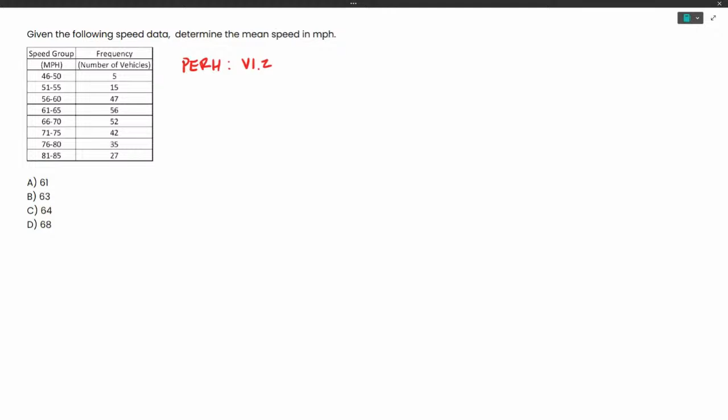Now this problem is a little bit simpler than it may seem. Whenever I saw this problem starting out, I was a little bit confused, and kind of worked through it, and it started making sense. So the first step is finding a formula, and this is going to be a PE reference handbook problem. You probably won't see this on the FE, but it'll be on the PE for sure. We're going to have version 1.2, that's the latest and greatest at the time of this recording. And we need to make sure that we're looking in section 5.1.2.5. That's going to be on page 274 of the PE reference handbook. When you go there, you're going to find a formula that looks like this: mean speed is equal to sigma.

I think it's the Greek symbol sigma. We're going to have a lowercase n with a sub i, and then a capital S with a sub i. I'll explain what all these are in a minute. And then we have a capital N in the denominator.

So to talk about some variables here, this X bar is your mean speed. I'm going to try to write neatly - I have terrible handwriting, but alright.

This guy right here is your frequency, so it's the number of vehicles in that speed group. The capital S is your average speed. We're given speed groups, and what we need to do is solve for an average speed out of those speed groups. I'll walk through that.

This in here is the total number of vehicles in our study, so that's just adding the frequencies up, and we end up with a number. I'm going to go ahead and get started here.

So our S, let me see if I have room. I'm going to write a capital S right there, next to that 46 through 50. What we're going to do is find the average of that speed group. This guy right here is 48. We have 53 on this next one. Let's see, 58, and then I think it's 63, 68, and so on.

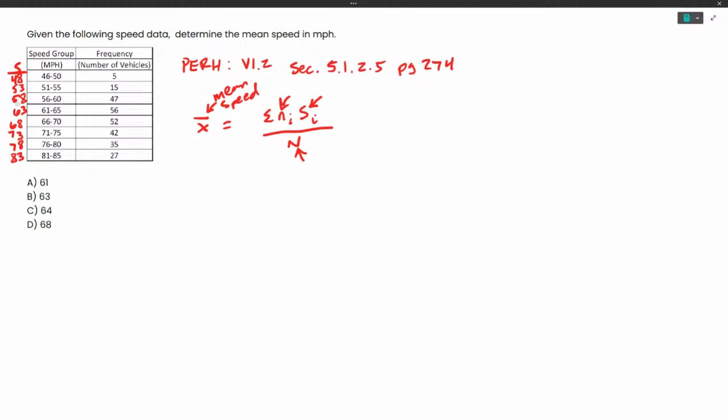This is the part where on a video I'd pause and edit it out because it's kind of boring just watching me write. That's 78, and this is 83. So basically what I did is 46 plus 50, divided by 2, you get 48. 51 plus 55 divided by 2, you get 53. That's your average in your speed group.

You're assuming that 5 vehicles are going 48 miles per hour. That's really the only way we're going to be able to solve this, by finding an average out of that speed group. Hopefully that makes sense.

So this guy right here, I'm going to write down here. We've got a mess of an equation. So we have 5 vehicles times our average speed, 48 miles per hour. Plus - this is going to be very repetitive here in a minute - 15 vehicles times 53 miles per hour.

There we go, plus - you see where we're going with this, this can get pretty boring pretty quick - 47 vehicles times 58 miles per hour. And always write out your units.

I had a professor, let's see, I think it was my junior year of college, who if you didn't write out your units would dock you 10 points, something stupid. It really frustrated me because I didn't write out my units, but looking back, I'm pretty thankful that he did that.

We have 56 vehicles - I'm going to have to double check and make sure this is all right after I write this stuff out, I might be missing one. Plus 52 vehicles times 68 miles per hour.

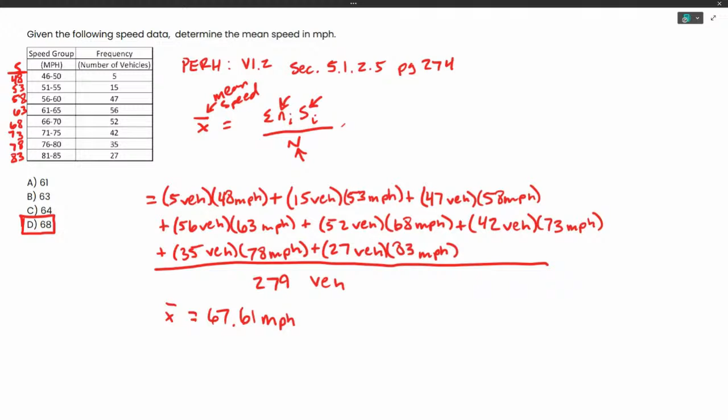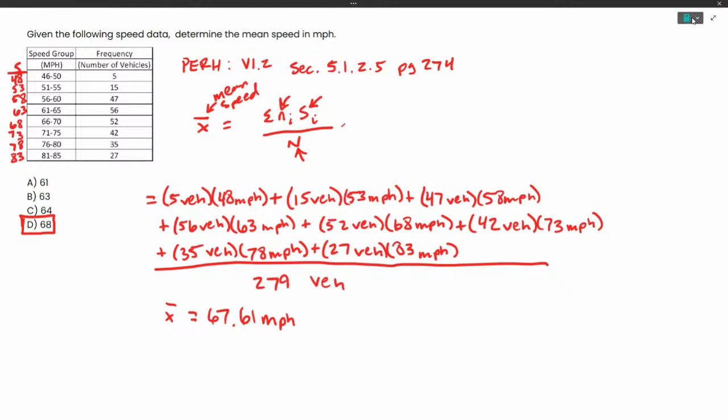Is there any questions on this one? I saw the chat lighting up, let me check. I think this one's pretty straightforward - I haven't had any questions related to the problem. Did everybody post good? I was jumping in there asking stuff. I think we're good. If you guys have any questions on this problem, please feel free to post it and we'll go back to it. There's no stupid question with these. Also, whenever I move on to the next problem, if you have a question about problem one while I'm on 2, 3, or 4, we can hop back - super easy, no worries. Aiden got the same answer, so you're good. That's good, that means I did it right.

This next one is pretty unique - something you could see on the FE or PE. The FE doesn't really give you a lot of material on it, so maybe they won't ask for the bearing but they'll ask what quadrant it would be in, something like that. For the PE, while I was studying, a similar problem popped up, so I figured this is a good workshop problem to work through. I'll give you some bonus info too while we're at it. This is a surveying problem, or basic math as I like to call it. I don't think there's a specific section on it, but it would definitely be a breadth problem - you won't find this on your depth stuff.

A surveyor has calculated an azimuth angle of 276.175 degrees. What is the bearing in degrees, minutes, and seconds?

It can get a little tricky, but if you think about this in terms of quadrants, you can solve this without even doing any math. But I'm going to go through the problem and explain how that's possible. I'm going to draw a picture - this is a good idea whenever you're taking the exam and see an azimuth problem. Go ahead and draw your quadrants or Cartesian plane.

An azimuth starts at 0 on the north axis, and it works clockwise. So we have 90 here, 180 down here, and 270 down here. We're starting at 0 and going around the circle until we get to 276 degrees.

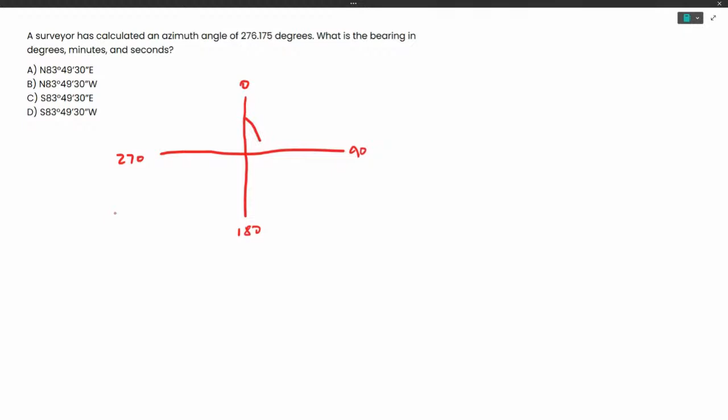I didn't have a protractor for this one, so it might not be exact, but this is 276.175 degrees. Now you can kind of see how, if you draw it out, you basically have the answer without doing any math. But it's good practice anyways.

This is north, east, south, and west - never eat soggy waffles, if you forget that, it's a good way to remember the Cartesian plane. So you can already see, from the north to the west, your some odd degrees - the answer is probably going to be... let me think, B. B is probably going to be our answer, but we're going to go ahead and solve it.

So what we need to do is solve for this angle. The way bearings work is they pull off the major axis being north or south, but it's going to be the nearest axis. We're pulling from north to west, that's the closest angle from a major plane. If you went from south, you'd do more than 90 degrees. So you need to pull off the nearest major axis, which would be north or south. You always start with north or south with your bearing, then work your way west or east.

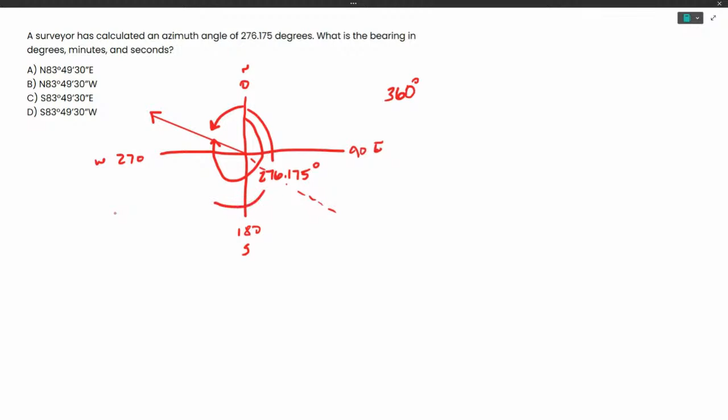So to solve for this angle right here, from north to west, we need to subtract 360 degrees, because it's 360 degrees all the way around the circle. If we subtract 276 from that 360, it will give us what we need from north to west. Does that make sense to everybody? I hope so. So we're going to subtract 360 degrees minus 276.175 degrees.

So what you end up with is basically the answer: 83.825 degrees. Now, the reason I included this problem is that it's essentially easy—you can solve it quickly within seconds if you know what coordinates you're dealing with.

The reason I included this is because you need to practice converting from decimal to degrees, minutes, seconds. There may be a problem on the exam where you have to solve for an angle and convert it to degrees, minutes, seconds, and they won't all be the same. So we could have had 83, 46, 29 or something instead of them all being the same. There were two different avenues I could have taken, and I chose the easy route for the answers, but I wanted to show you guys how to do that.

Now, there should be something on your calculator. Let me see, I've got a TI-30X IIS, whatever that is. There's a way you can convert to degrees, minutes, seconds, so I'd definitely look into your calculator to see if you have that tool.

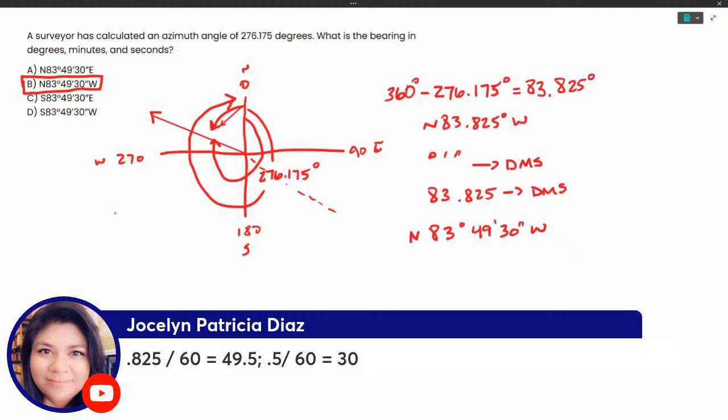Everybody good? Any questions? No questions on that one. All right, moving on. All right, we got a theory problem, everybody.

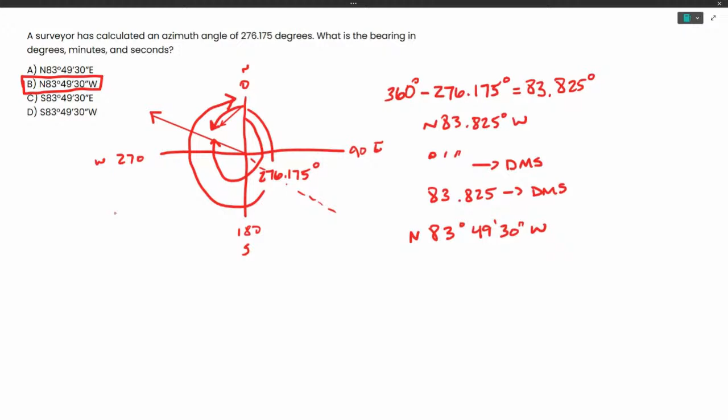I need some engagement out of the audience. Everybody's been pretty good so far, but this one I need some help with. If you're taking the transportation depth, I think this would be right up your alley. You should probably know the answer to this one. This is going to be a traffic engineering, traffic analysis problem.

So out of the chat, I'm going to give everybody like 15 seconds, kind of give me an answer, and we'll go from there. I'm going to count down in my head and give everybody 15 seconds. It's okay if you don't know it—I'll answer it. In the meantime, I'll talk about the course.

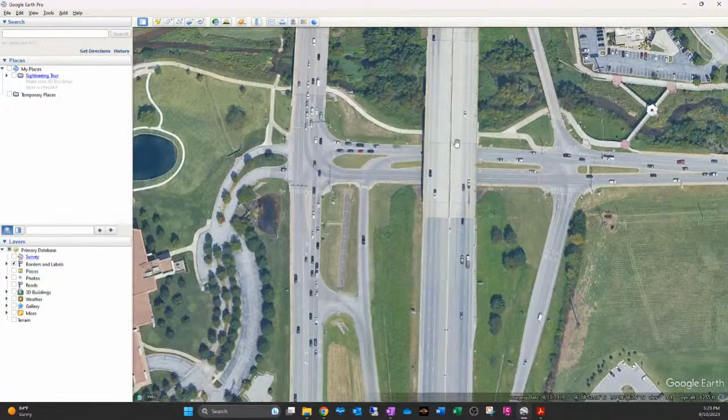The reason why I know it's a freeway is number 1, because it's got these little off ramps, right? And it has an overpass. And that's what it means by an at-grade intersection. An at-grade intersection would be something like this, where you have an intersection at grade, so that you're not going to have an overpass or something. A freeway has something similar to this, where you have an overpass and you have these on-off ramps like this.

I think freeways can have anywhere from 4 to 8 lanes, and a multi-lane highway is 4 to 6, I think. Here's your multi-lane highway over here. Here's your twiddle - your 2-way left turn lane. Remember, this is not necessarily a median, it's a 2-way left turn lane. So if these guys need to turn left, they can hop in here and go that way, or vice versa. They can use this to get on.

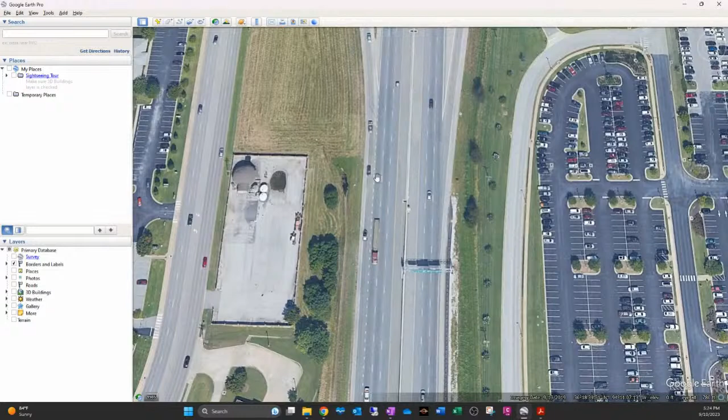This guy has on-off ramps, and then it's got this median right here. You can't really see it, but this is a concrete barrier that separates the northbound traffic from the southbound traffic. So with that said, is there any questions about that?

Does anybody have any additional questions while I've got the fancy Google Earth pulled up? Everybody good? Go into the chat rooms. It looks like we just had our answer selections. Some are kind of all over the board with C's and D's, but nothing about.

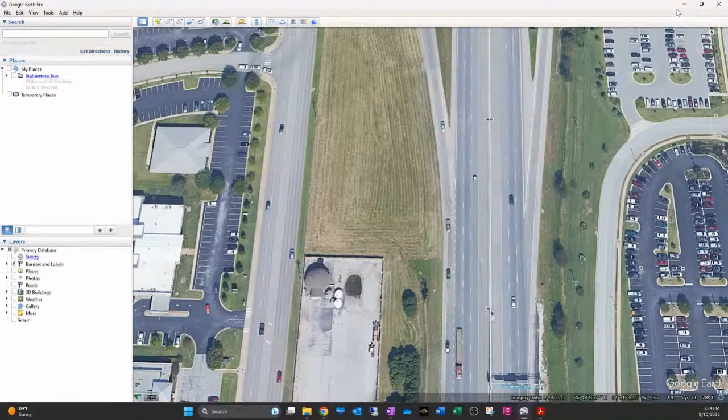Yeah, the reason why it's not C is because typically a freeway will have a divided median. It is a characteristic of a basic freeway segment. Enters, exits only through interchanges, same thing - it is typically a freeway segment or a characteristic of a freeway segment. So that's why it's not C, D, or A. B is going to be your answer.

The main difference between freeway and multi-lane highway, for the next problem, is at-grade intersections and divided medians, right? So if you have an at-grade intersection and not a divided median, you're talking a multi-lane highway. Yes, a highway would be... no, sorry, let me think. A highway is not D, it is a freeway. So a highway has at-grade intersections.

So you hit a traffic light and you turn - basically what I just had pulled up on the Google Earth. I thought you said freeway, that's why I got confused. Here's your highway, right? So you have a traffic signal right here. We have a traffic signal here, an at-grade intersection, and then we have a freeway here that has an overpass.

So D, enters/exits only through interchanges - think about it entering the next facility. This guy, if they're traveling on a freeway, they have to enter/exit through this interchange. They have to hop on this ramp to take a left or a right. These guys right here, they don't have to do that - they just hit the traffic signal and they turn, or they go straight. So that's the difference between a multi-lane highway right here and a freeway.

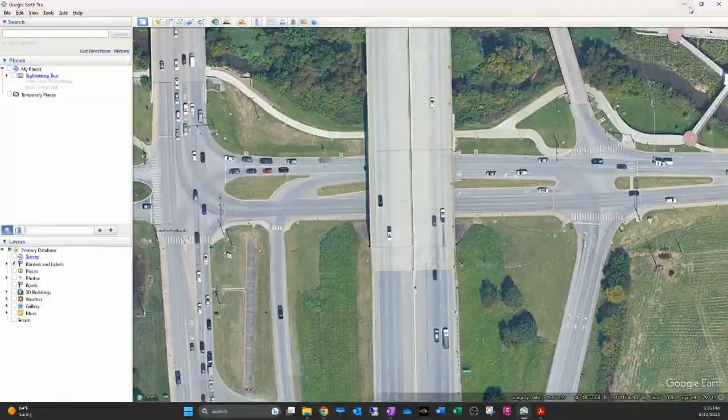Everybody good? Is that still confusing? Did that clear that up? I appreciate the question, yeah, I think we're good. All right, we're going to move on. If there's any further questions, we can hop back, but I'm going to go ahead and move on to the next question.

Problem 4, all right, here's another one. I need audience participation again. Don't be scared to be wrong. Nobody knows you. This is going to be an FE or a PE problem - this is going to be something that you just need to know. I would lean more towards the PE type of thing.

Could I pause you? Yes, we have one question on the last one - no signals on a freeway? I haven't come across a signal on a freeway, so I would say you're correct on that. I would say that's a good question, yeah, that's correct, because it would be an uninterrupted flow - the freeway is always uninterrupted, it doesn't have traffic signals or anything like that. But a highway, multi-lane highway, can be uninterrupted or interrupted depending on the frequencies of the signals. So if the signals are really close together, it's an interrupted flow type of analysis.

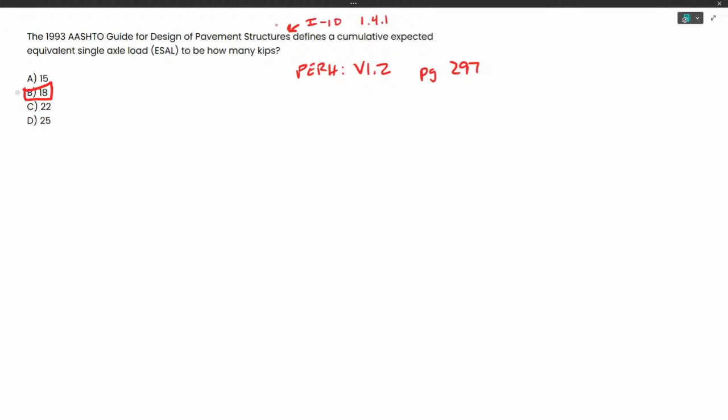We got a banger of a problem on deck. I'm excited for it. No questions, just a lot of comments on B. Motorhead1 says 26 kips on modern trucks, FYI.

All right, here's our big daddy right here. This is going out with a bang, our last problem of today, and then you can go back to your football. I know it's a letdown that you have to go back to football, but this is good stuff.

So here's your FE. Let me make sure I have an FE standard for it. Yep, I do. This is an FE or a PE problem. We're going to be talking about pavement evaluation again. This is an ESAL problem.

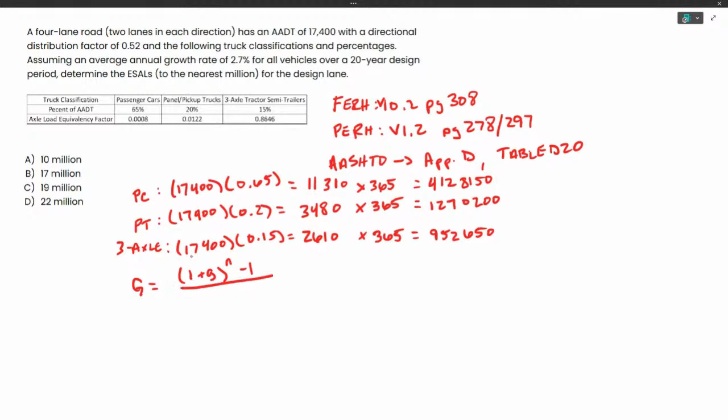It's 1 plus G, lowercase g, raised to the n minus 1, and we're going to put that over our lowercase g. Now this right here, like I said, you might remember it from economics. It looks a lot like the F given A from engineering economics.

I know a lot of people have pain, PTSD if you will, from engineering economics. I did, I think I had to take it twice. Maybe I took it once, but it was such a long class that I hated every bit of it, and it felt like I took it twice. Maybe I did, I don't know.

But F given A is as follows. You're solving for F given the A, that's what that stands for. If you're kind of lost right now, I encourage you to go check out some of the engineering economics problems on YouTube under Civil Engineering Academy. We have some pretty good practice problems there.

So this is equal to A times 1 plus I, raise that to the N. This is just familiar territory, it's nothing to do with the problem, it's just so I can show you the link between the two. It's essentially the same thing, right? So we're solving for a final growth factor, except we just don't have this A. That's the similarity between the two equations there.

So if we're going to solve for this guy, it ends up looking like this: we have 1 plus 0.027, so that's 2.7%, raised over a 20-year design period, 0.027, and this is going to be minus 1 on the numerator.

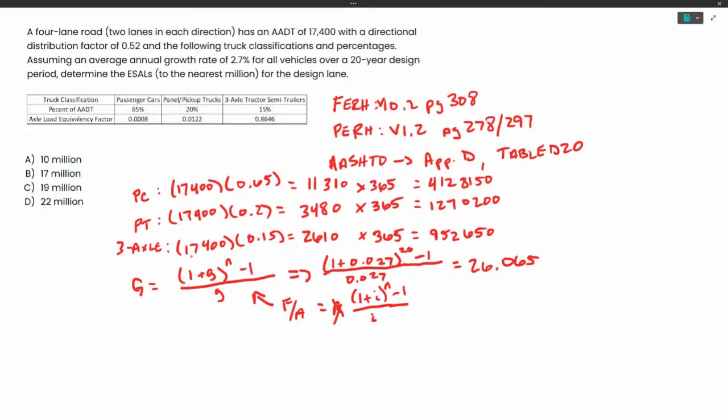So I'm going to go ahead and scroll down just a little bit. What we're going to do is take the passenger cars, the panel trucks, pickup trucks, whatever you want to call them, PTs, and the 3 axles. We need to make sure we multiply these guys by the growth factor, so that's what I'm going to do next.

I'm going to take, let's see, 412, 8150. The passenger truck or the pickup truck was 1270200. Yep, that matches. And this guy's 952650. Everybody still on board? Everybody still awake?

We're going to multiply this by the growth factor, 26.065. Same thing with this dude.

So basically, remember what we did was we took the average annual daily traffic, and we split it up between the different truck classifications, multiplied it by 365 to get us to a yearly quantity. And now we're forecasting that yearly quantity based off the growth factor and the number of years that we want it to grow, or that we're designing this pavement for.

Okay, so that's what we're at now. We are forecasting it with that growth factor, 26.065. Okay, this guy's equal to that, that's equal to that. Okay, so now we're getting into some really, really big numbers.

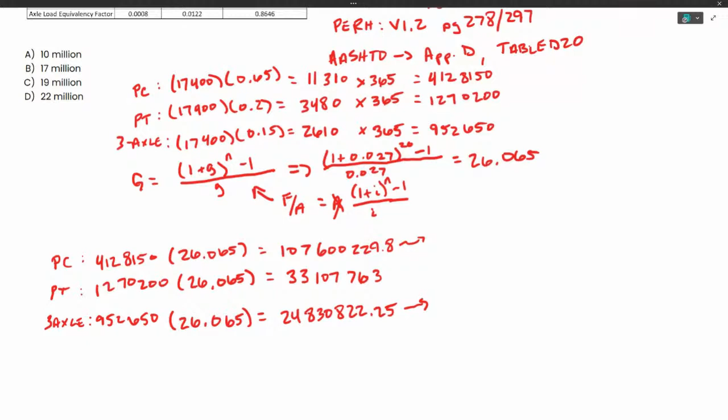So with this next calculation, I'm going to round up to the next vehicle. So I'm going to say that there's 107,600,230 vehicles or passenger cars going through this study area in 20 years. All right, just a heads up on that, I'm going to round up those two. Don't worry guys, we're almost done. Okay I know you're having a lot of fun, but don't worry, we're almost done here.

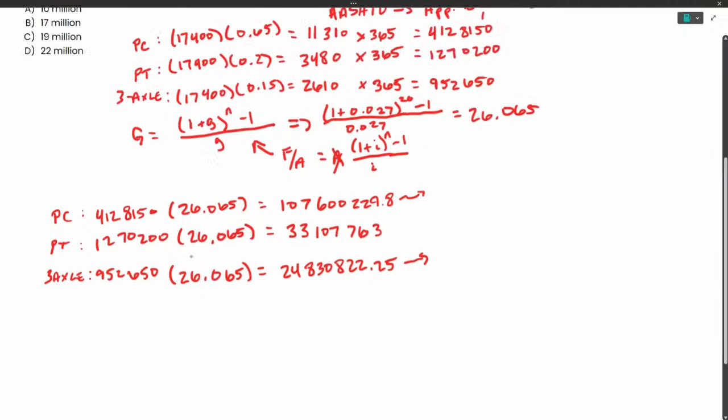So now what we need to do is multiply our design traffic times our ESAL factors. Remember, our ESAL factors are given to us. It's given to us right here.

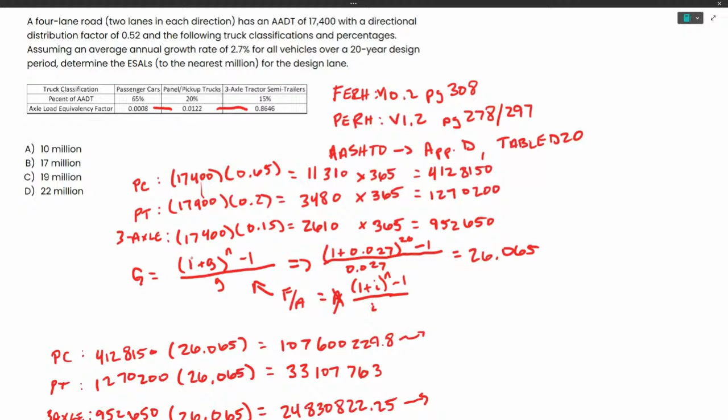That's what we're given, so we're going to multiply our design traffic that we just solved for. We took a yearly quantity of vehicles, forecasted it by 2.7% over a 20-year design period. Now we have our design traffic, or forecasted traffic counts every single year based on the particular vehicle. We multiply that by our axle load equivalency factor, 0.0008 - I think that was 3 zeros - 0.0122 and 0.8646 respectively. We multiply those by the particular traffic classification design traffic, and we end up with a number of ESALs. We're getting there, we're so warmed up.

So for passenger cars, let me start another row here: passenger cars, panel trucks/pickup trucks, 3 axle. I'm running out of time. Okay, we have 107,600,230, and then we have 33,107,763, and then 24,830,823. Now we need to multiply it by our ESAL factor.

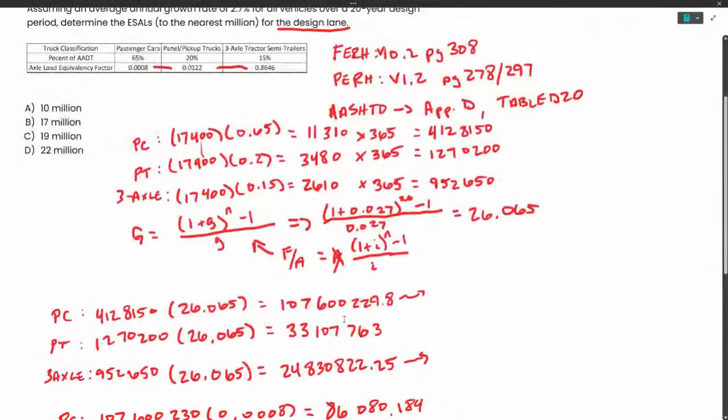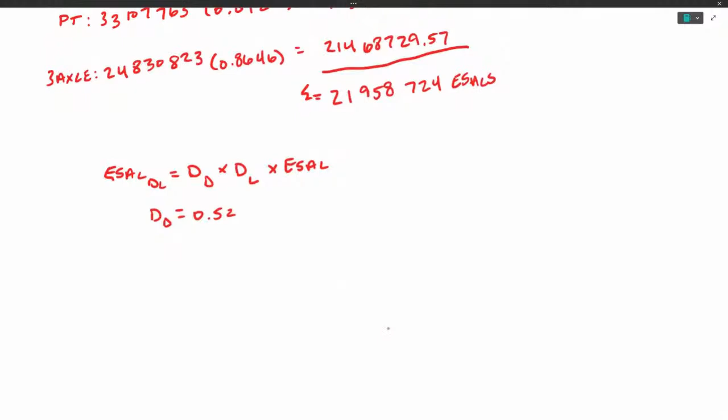Right there, so that's our directional distribution factor. Let me scroll down. Our DL we can find in the PE reference handbook, on page 278.

So I'm going to write PE reference handbook. I apologize that we're over on time, everybody. I really do, I thought I had more time than I did.

This is page 278, and what you have to do is understand there's 2 lanes in each direction, which means there's 80 to 100% ESALs in our design lane. Given that, since the problem states 2 lanes in each direction, our DL is going to be 0.9. That's expressed as a ratio, so if it's not provided, you'll have to interpolate.

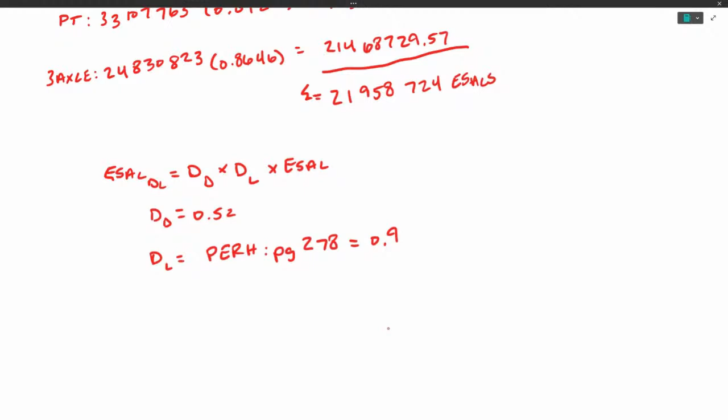All right, let's see here. So now I'm going to scroll down and we're going to go ahead and plug and chug. ESAL in the design lane is equal to DD, which is 0.52. We're almost done, we're almost done. Times that 0.9. And then we multiply that by our ESALs.

Remember, we added all the ESALs up for the passenger car, the pickup truck, and the 3-axle. It's going to be 21,958,724 ESALs.

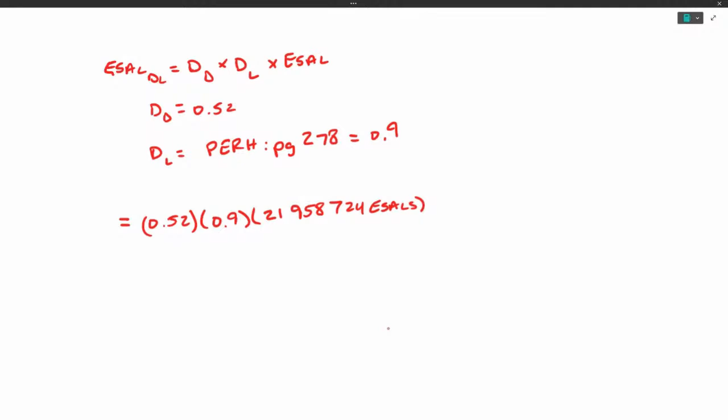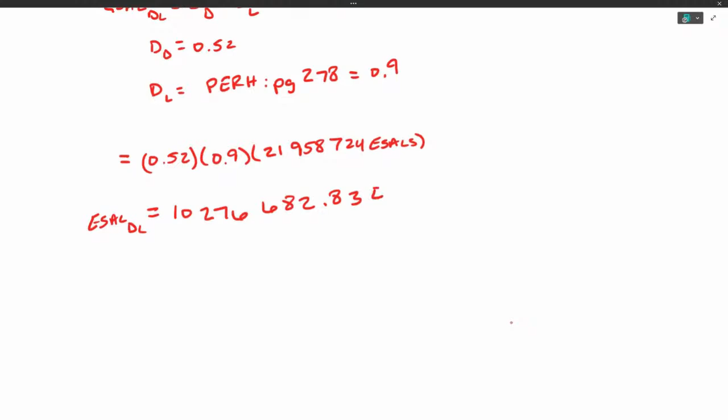All right, let me see if I rounded right there. No, I didn't. All right, and so finally, whenever we add this guy up, ESAL in the design lane is going to be equal to 10,276,682.83 ESALs. This guy's going to be, to the nearest million, it's going to be A.

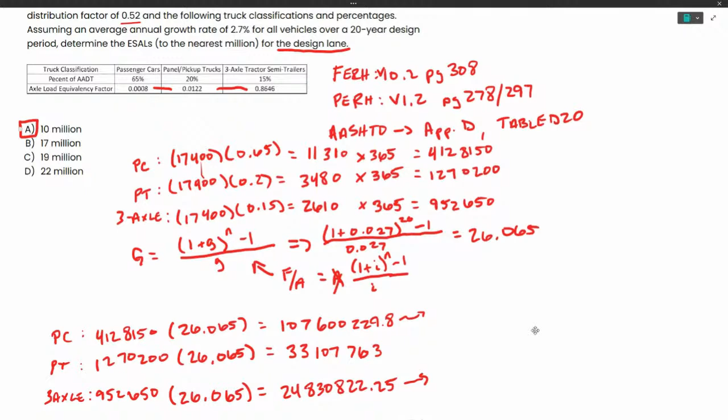Everybody good on that? Any questions? I apologize that I went over in time. I'm going to hang out, if you need to go that's fine. But yeah, the answer for this one's going to be A.

That one put him to sleep, Cody. Yeah, I believe it, I told you it was exciting. I told you I was trying to hype everybody up before it, that way I didn't have anybody falling asleep, and it looks like it happened.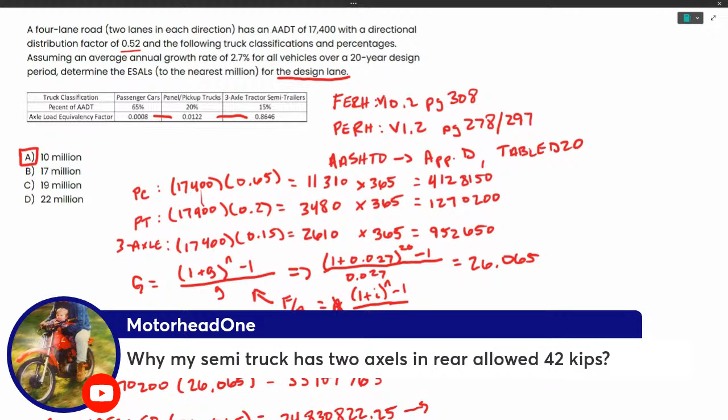There is a question that popped up: why, as my semi truck has 2 axles in rear, allowed 42 kips? Was that part of the problem? Yeah, I'm not sure, where is that coming from, I guess? Maybe a little more detail on that one, Motorhead. Good question, though.

Yes, thank you, got the same, you're welcome. Looks right, thank you. It was great, got the same answer. Good, awesome, way to follow along.

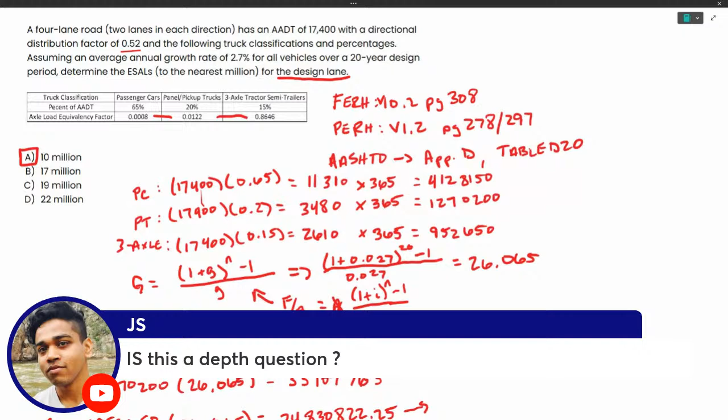Practicing problems takes time, but it could be that they would have to give you the material you find in the AASHTO Appendix D, table D20. Obviously you're not given that. But they could make it a lot simpler and make it a breadth problem, giving you stuff and just making you use that formula found in the PE reference handbook. Anything that's in the reference handbook is fair game for the breadth, so heads up on that.

If you aren't studying any of the transportation stuff in the PE reference handbook, I'd definitely take a look into that and see what all is in there, like horizontal alignment, horizontal curve, vertical curve, that type of stuff. But as far as diving into references like the AASHTO book, you won't have to do that for the breadth. Does that answer your question?

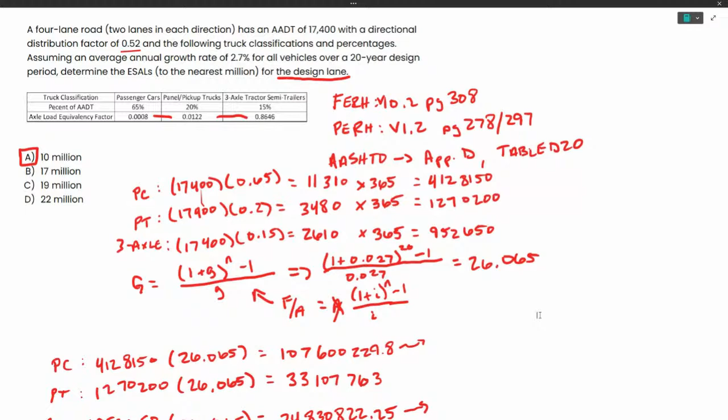Yes. Good. Awesome, well let's go ahead and wrap this up. We'll just turn our screens on real quick.